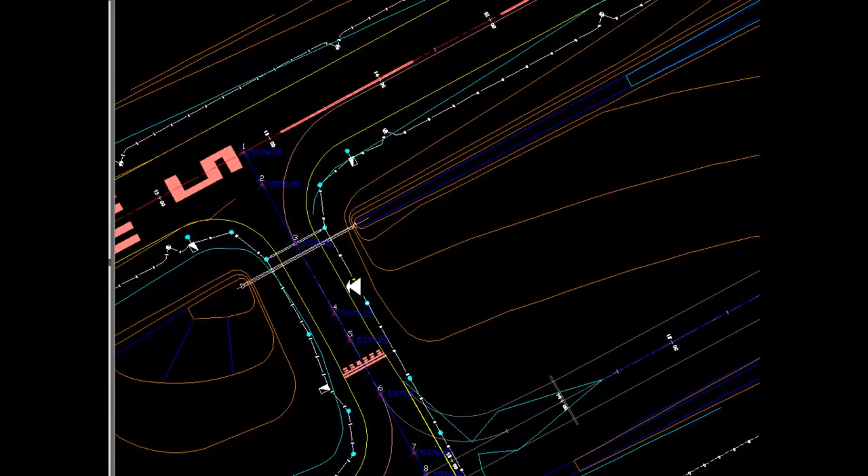This is a job I happen to be working on right now. It's an airport, and you can see the runway here, and we have a taxiway that allows a plane to kind of come around here and work itself up to the end of the taxiway. And inside this taxiway area is some retention. We also have retention across the taxiway, and then there's some areas for a future taxiway here that runs parallel

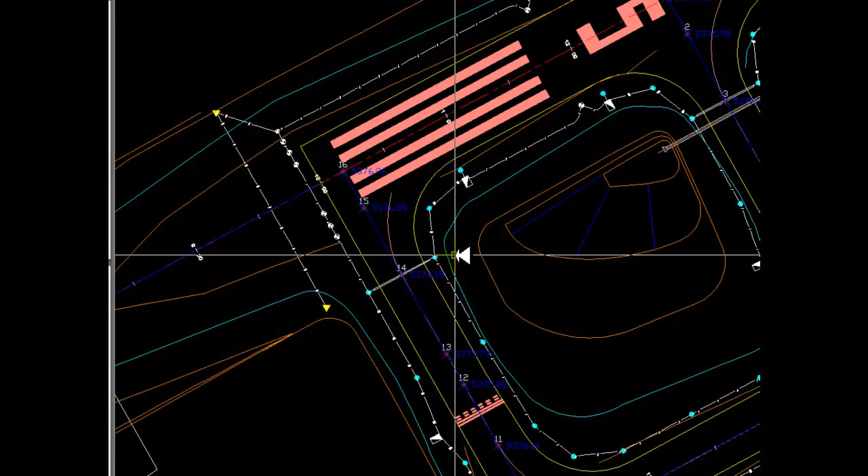to the runway. Now, with a lot of different things going on, we've got a real good mix here of critical and I won't say non-critical, but less critical work that needs to get done. And let's talk about the critical stuff first. This job, like any other runway job, is technically a road job. So we're really conscious about where the center line is and what it's doing and how to find it and how to work off it.

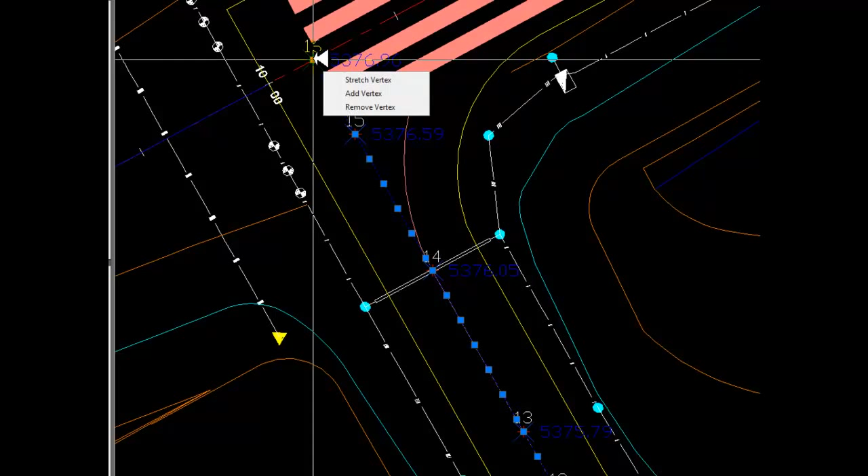Now, you'll see the stationing starts here at the edge of the runway at 10 plus 00 and kind of works itself up, and then we pick up this taxiway here. Now, I've generated points along the taxiway that are going to allow me to do two things. It gets me on the center of the runway, plus it gets me at the start point of the center line of the taxiway. And I'm going to really make sure I get correct on this point. So I'm going to do point stake out here, and then I'm going to come down and probably stake out these points. But look what else I get.

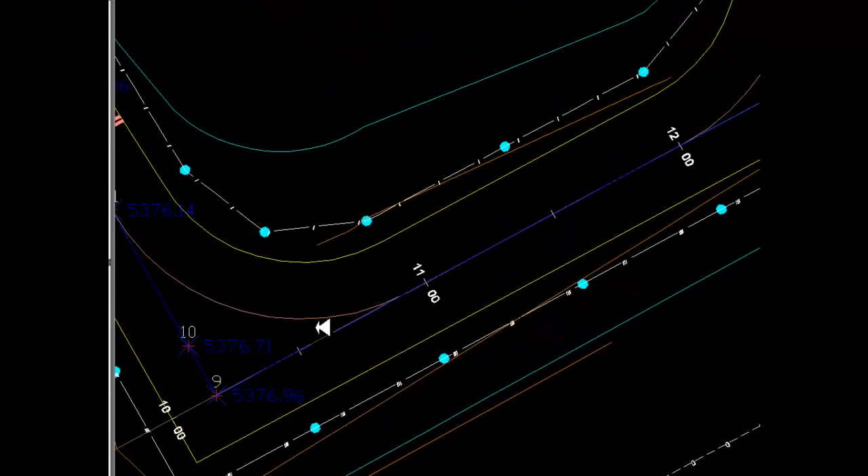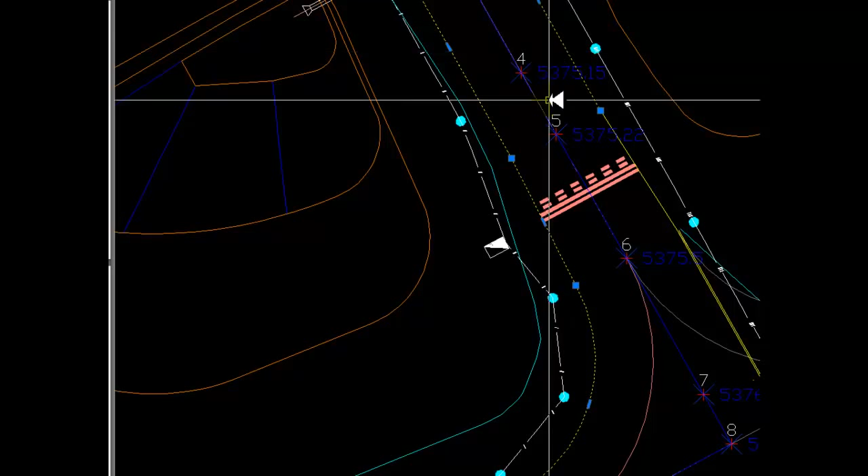I get the PC for the striping. I get the intersection of the center line of the other taxiway, and the same thing happens on the other side. So I've easily now picked this up, and when I've generated a decent amount of points here, then I know offsets to the left and right side, and that's going to allow me to not only find those, but to measure off and get those. So you may or may not want points on the sides, but as long as you have them in the center, you're certainly able to generate and find edges of pavement.

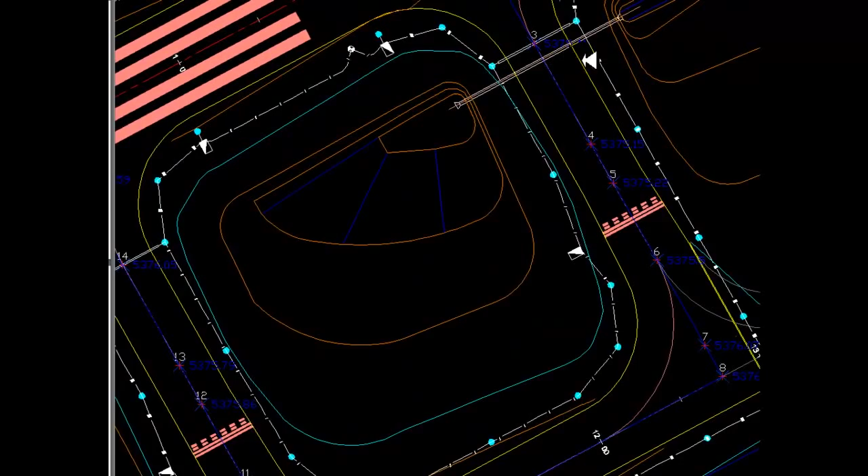Now let's talk about some non-critical areas that aren't going to require you to do as much, or let's say any point aligning, if you will. So I'm looking over here at a retention area. Obviously, it's going to take some precision. You want to locate this flared end section in the pipe real well, so that's going to require some points. This grading here for the retention area, I'm going to hit the bottom and probably find some points at corners and also angle points for turns. I've got the PC and the PT of this curve here and also this one.

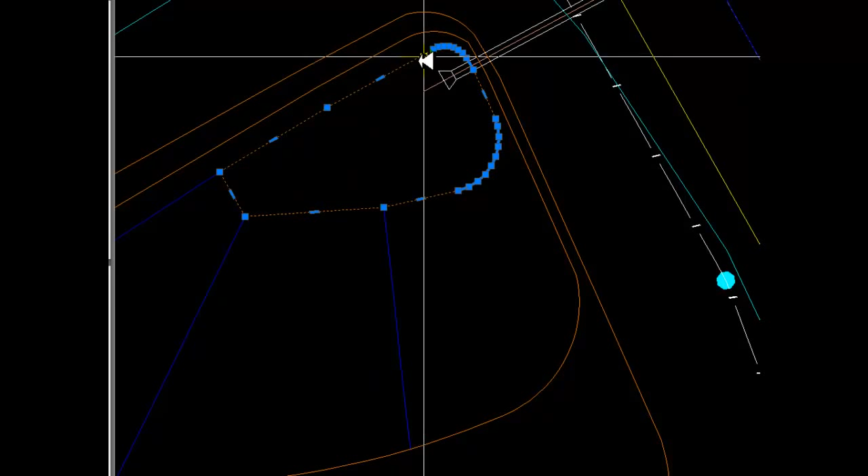So I could do this with 1, 2, pick up over here 2, 3, 4, 5, 6, 7 points, and that would kind of give me the perimeter, and then I could either connect the dots by running string, or I can go in and find the line and just verify that I'm in line with the next target. Same thing happens with other areas of the retention. Here's the top of the retention area here at this 5-foot blue contour. So that's going to give me what I need, and then right outside of that you'll see some electrical.

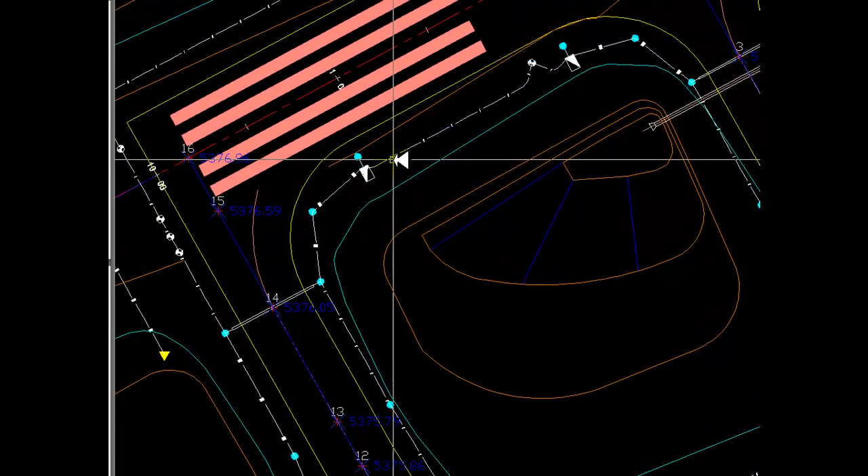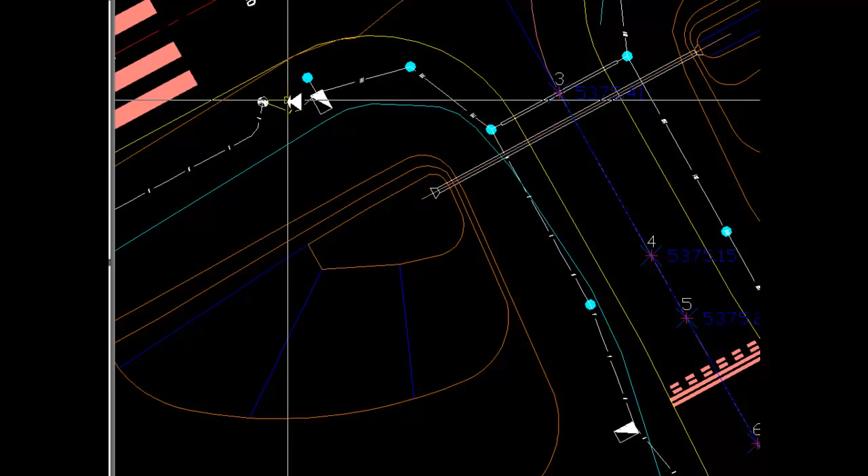And what I basically have is a proposed electrical circuit that's going to kind of join all these runway lights together. And a lot of times electrical is sort of drawn like this because it's not as critical, and you could certainly lay this out with about the same accuracy. Now you've got to locate the lights in the right spot, but the cable connecting them doesn't have to be as critical. What you may want to do though is after you've installed the electricity and while you've got your trench open, go in, shoot some points, because now you've instantly done your as-builts and saved yourself some headaches in the future.